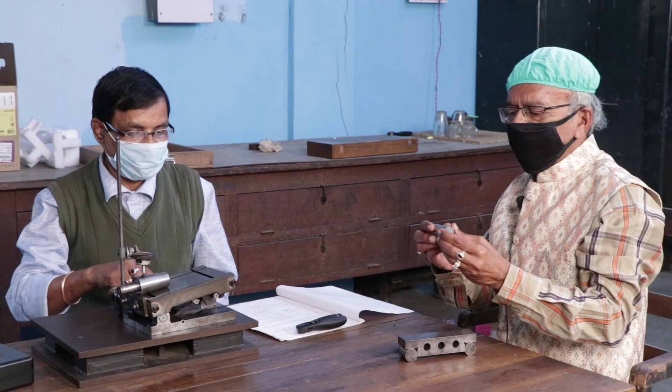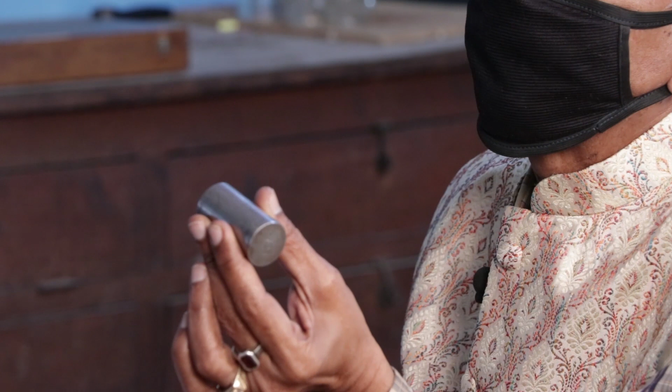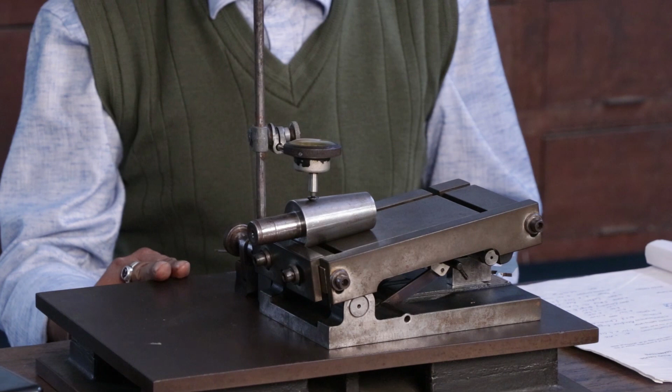It is completely cylindrical job, or we can say it is a right circular cylinder, like this. But if the job is taper in nature, like this job, which is a cylindrical taper, just like our lathe center, we have to find out mathematically with the help of some instruments how the taper of this job can be calculated.

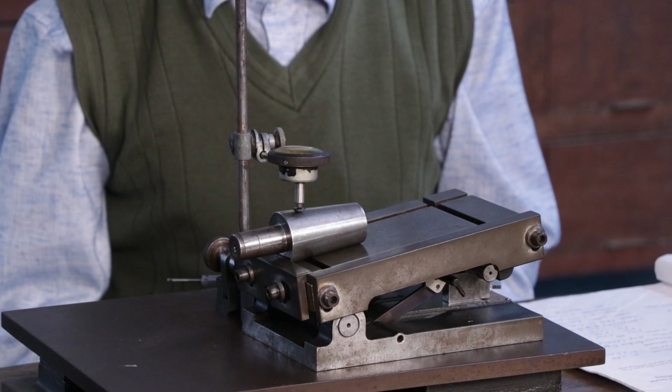Taper means always larger diameter to smaller diameter, so there is a continuous decrement of diameter. With the help of a sine bar as well as a sine table, both are same in appearance somewhat different, but with the same principle, we can find out the external taper of a cylindrical job.

What is the objective of the experiment? The objective is to find the included angle of a taper, not only the included angle, but the included external angle of a taper plug gauge with the help of a sine bar.

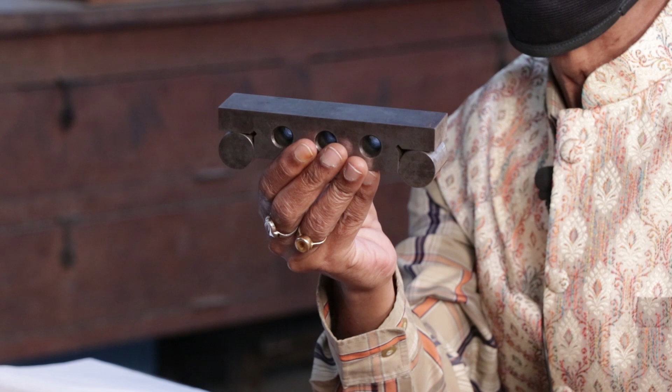What is a sine bar? You please see, basically this is a sine bar. With the help of the sine bar, we can find out the included angle of a taper plug gauge.

This figure has been printed in the data sheet. You please see this sine bar. Sine bar is sold in the market with respect to the length in between these two rollers. If it is 5 inch, that means the center distance between two rollers is 5 inch.

We will also take the help of another instrument known as the sine table. We have taken the sine table because it helps us hold the job. It has got two rollers, one with higher diameter, another with smaller diameter. We should adjust it during our calculation; there is some reason behind it.

Another instrument which we need is the vernier caliper. Another instrument which we need is a box of slip gauges. You please see, different types of slip gauges are there having different dimensions.

And the final instrument we need is a dial gauge, which will certify when we take our dimensions from the slip gauges.

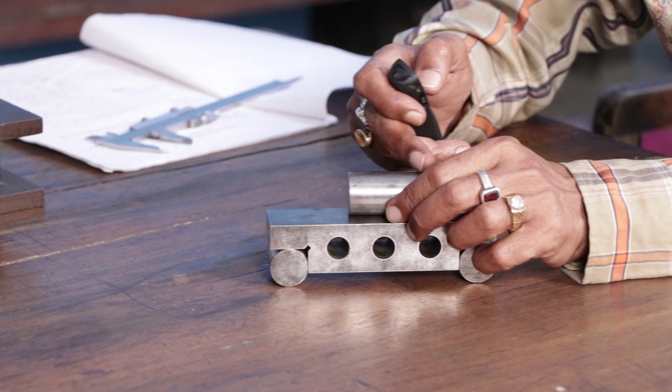What we do actually, you please see this picture. The job was taper, you please see this job, this is the angle, this is the job. If you keep any job over here, this becomes parallel, but if the job is taper, certainly this will not be parallel.

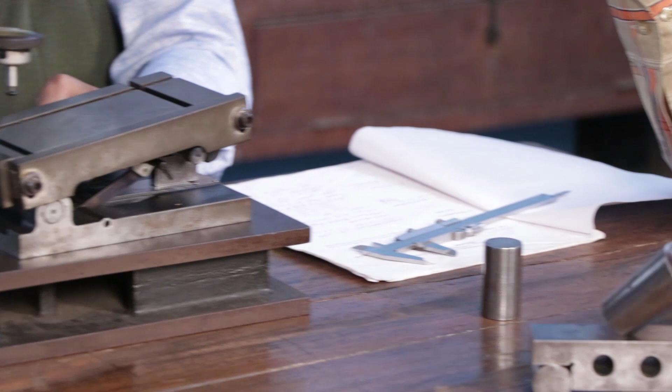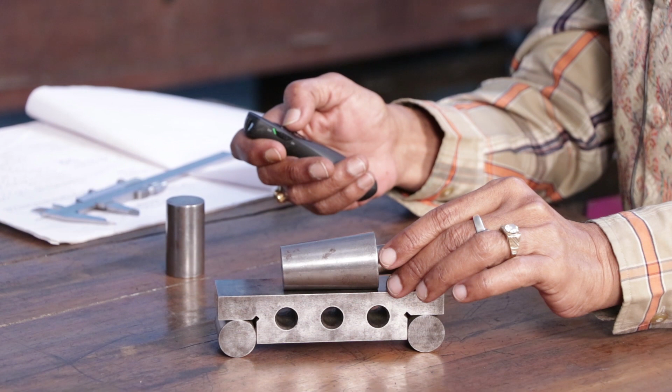Can you give me this job? Certainly, if you put this job over here, basically it is an external taper job. If you keep it like this way, certainly it is a continuous decrement of diameter.

You should find out the included angle with the help of either sine bar or sine table. If we put this dial gauge over here, if you move from left to right, certainly there should be deflection, because the dial gauge is on the higher diameter. When you slide it, certainly there should be some gap.

But if you put the dial gauge over here and come from right to left, there is a continuous deflection in the dial gauge. That means it is not parallel. If it is parallel like this way, certainly if you put the dial gauge anywhere and slide it left to right or right to left, there should be no deflection. That indicates this surface is parallel to the surface plate. So how should we make it parallel?

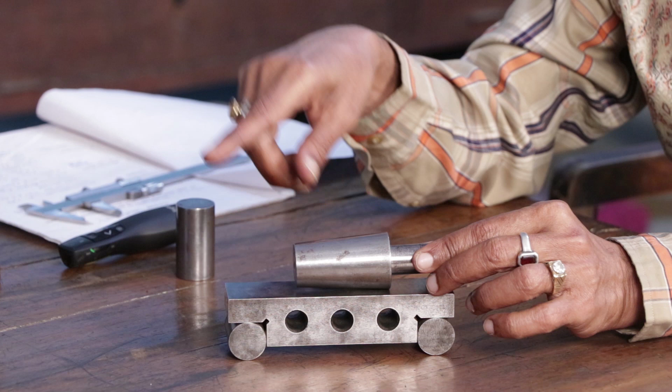If we put it like this way, you might expect it is not parallel. So what should we put? We have to take the measurement, so it is better to put a number of slip gauges over here. But in this instrument, it is not possible to provide the slip gauge over here.

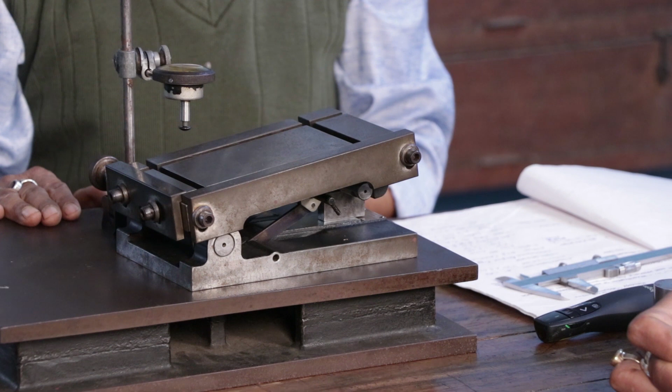This surface and this surface are parallel. So if we put a slip gauge here, that means this end has been raised. One end of the sine table has been uplifted by the slip gauge and it becomes parallel.

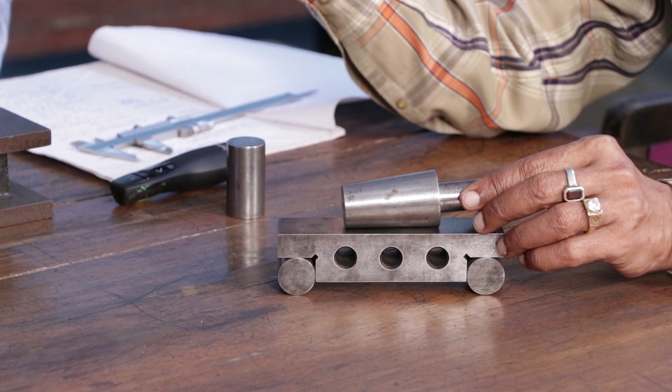We can measure the upliftment by counting the total result of the number of slip gauges, as well as the measurement given on the slip gauges. So this is the technique, but why?

It is known as sine bar or sine table, or basically the sine principle, which we have adopted. We have read about this in our school level, that is this point.

The inclination, if you increase the length, it will anywhere join over here on the surface plate. Please think, this is the vertical line and this is the horizontal line, where this line will meet. Certainly, we can find out the angle. So which angle?

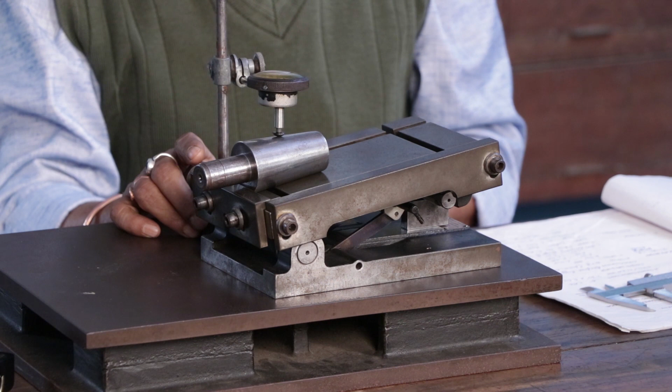You please take the center line or the top line like this way, and this side, which can be calculated by the value you have got from the slip gauges. Simply go on adding the number of slip gauges and the measurement written. So this angle, with the help of sine, that is sine theta basically, we can find out the included angle of an external job.

So what are the things required? Sine bar, this is sine bar. Today, in exchange of sine bar, we have taken the help of sine table; simply it rotates, nothing more. Box of slip gauges we have here, dial gauge we have here, and vernier caliper, which is required after some time. This is the vernier caliper. So Arun Babu is going to demonstrate how to carry out the experiment.

Arun Babu has kept the job this way, so the top surface is not parallel to this surface. It is inclined. If we extend the line it will come somewhere over here, and this is the horizontal line.

Now it is the duty of Arun Babu to place the required number of slip gauges, whether one, two or three, using the process known as ringing, to make the top surface parallel to this top surface. Arun Babu, please show us.

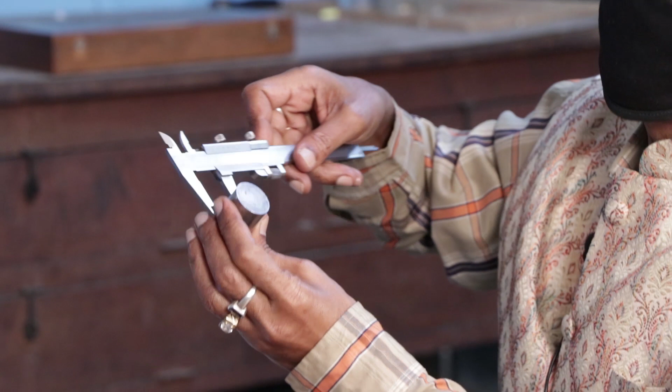He will take the dimension with the help of this vernier caliper, and by this he will be able to calculate the included angle with the help of the sine principle, along with some mathematical calculation. Now please see the mathematical calculation.

We have got this length with the help of the slip gauges. Another length is required because the length of the job is known to us. So we can calculate this theta. What should be the value?

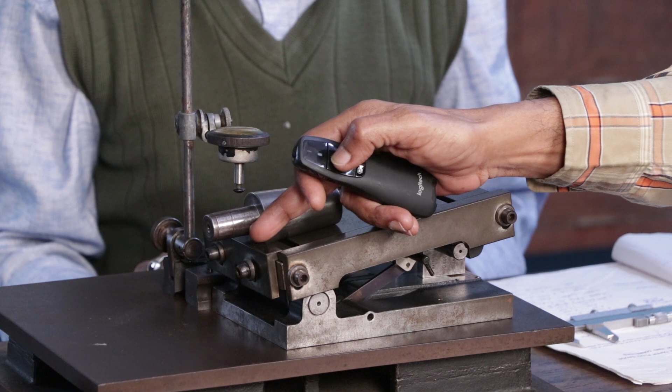Now, the procedure should be supplied to you in class, it should be supplied to you through the computer, and this PDF file should also be given to you. Now the last point, please see the procedure again.

Please see, one roller has been placed over here to find out the deviation, mind it. Initially this line was completely parallel. So if you move the dial gauge from this point to this point, you will get no deflection, more or less 0 deflection for our consideration.

After that, when the dial gauge comes over here, deflection will appear. Please see the other roller - which roller has the higher diameter? Which roller has the higher diameter? And this roller has the lower diameter. And this is the number of slip gauges which has been placed over here.

So this is calculated by adding all the values of the slip gauges. So there is no problem, I think. With the help of this, we can find the diameter of these two ends, the larger end and the smaller end, as well as the included angle.